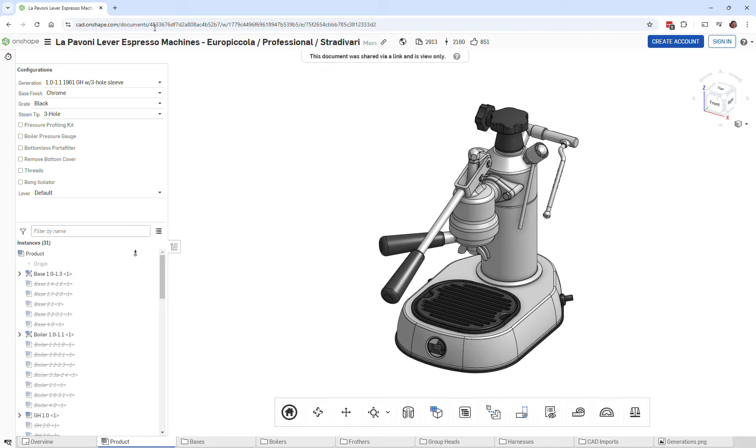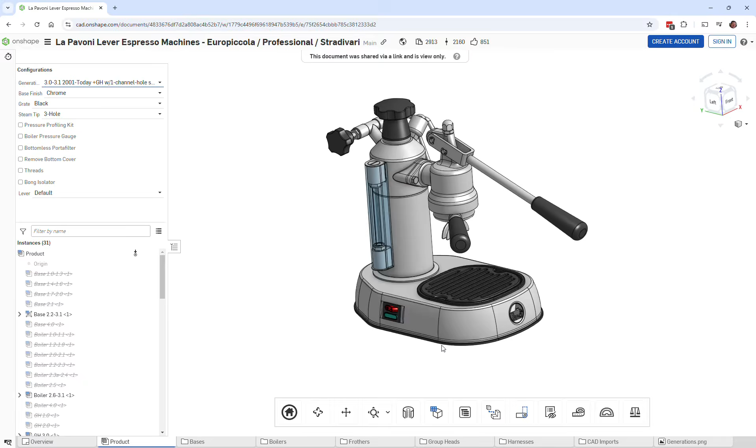So what I'm going to be talking about is we'll first take a look at the Europiccola version 3. It comes with a power switch that's essentially an on-off and a green light. This unit heats to a particular temperature, typically about 0.7 to 0.8 bar of pressure in the boiler, and that's how it works - we use that both for brewing espresso and for steaming milk.

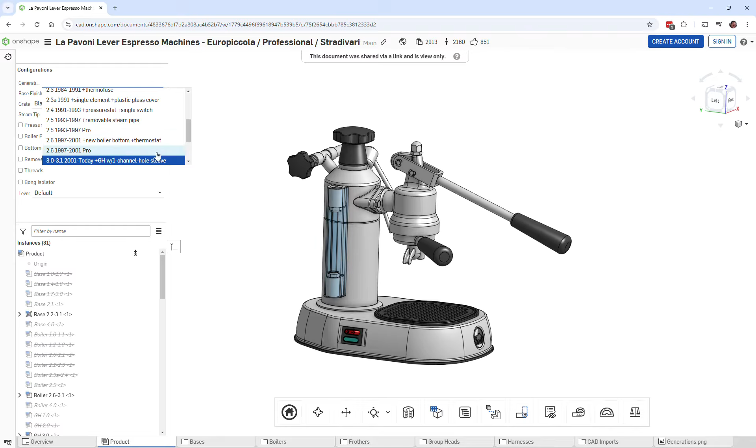There's an upgrade available at Coffee Sensor where you can upgrade it with a dual range pressure switch, and you can see that the switch here changed - there's an on-off switch, and then there's a low-high switch. We've had low-high switches in previous generations of La Pavonis; Generation 2 had some of those at some point. The difference is today's La Pavonis only have a single heating element. The way the low-high worked on the previous La Pavonis is they had two heating elements inside. So we're back to a low-high, but with a single heating element.

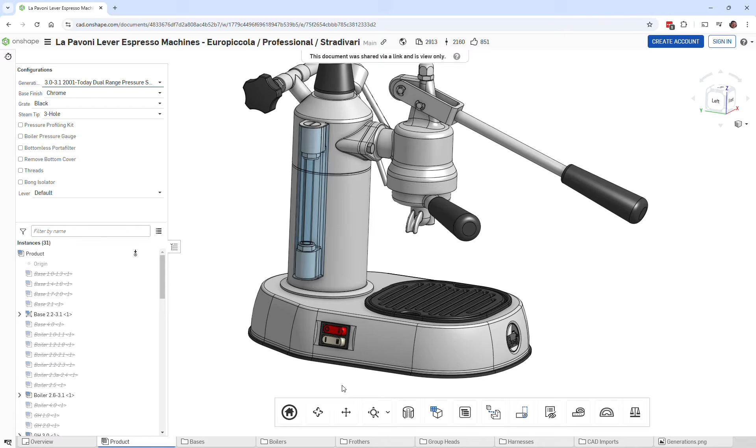So how does that work, and how is this wired up? Let's take a look at the bottom of the La Pavoni with the dual pressure switch. And in fact, let's go back to the one with a single pressure switch.

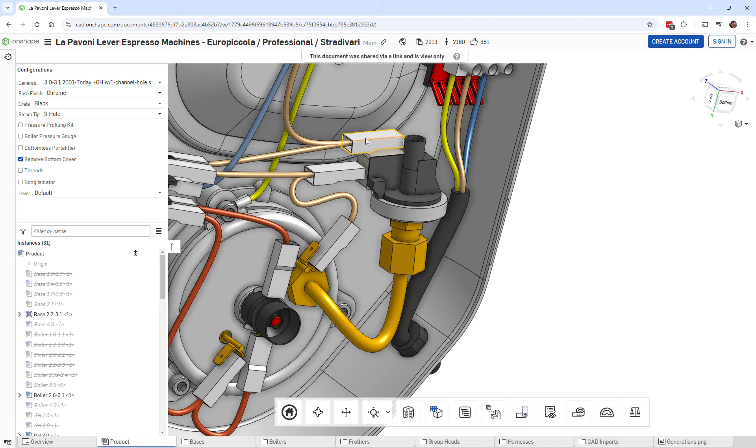You can see here generally how this works is there's a switch here that's connected to the boiler, and this turns on and off, connects these two wires on and off based on the pressure inside the boiler. If the pressure is too low, it will turn the switch on. And if the pressure is too high, it'll turn the switch off. That's kind of how it regulates the heat.

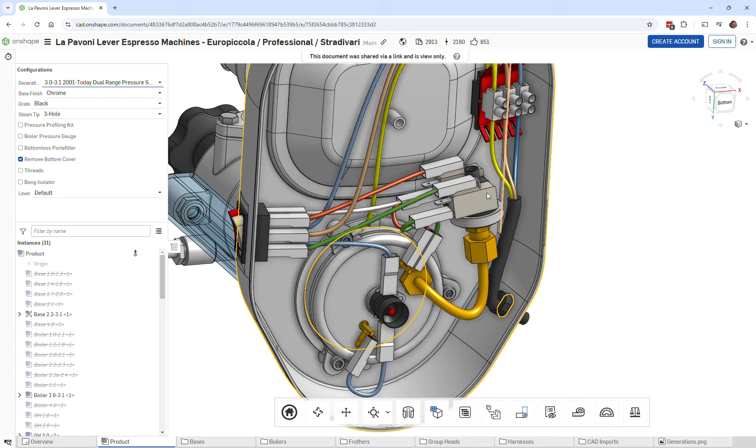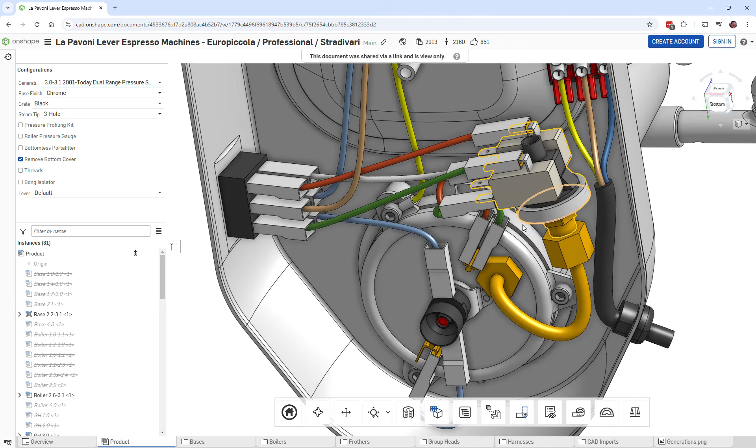We're not going to go into the details of how that is wired up, but we will go into the details of the dual range. You can see the switch changes, and now all of a sudden we have two switches on this pressure stat. Again, it's monitoring pressure inside the boiler, and at a low pressure it turns this switch on, and at a higher pressure - you can kind of see this is raised a little higher - it turns this switch on. So how do you use that to create a dual range, and how do you then incorporate this low-high switch along with the on-off switch in your wiring?

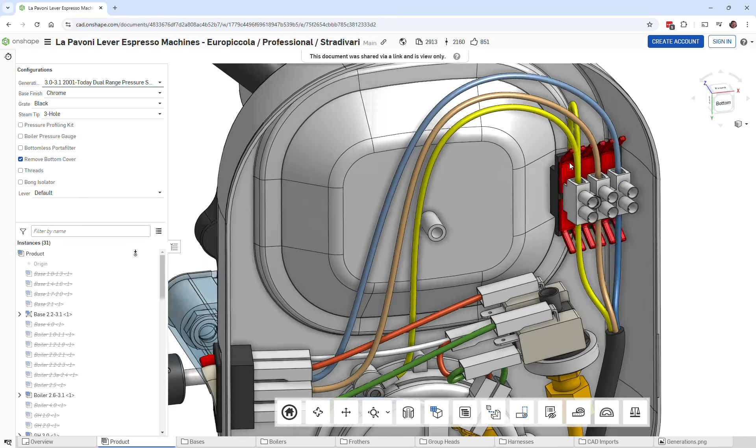So that's what I'm going to take you through. The first thing is the yellow wires here are for grounding. We just go ahead and cover those because those are kind of a safety requirement. Run your grounding wire, make sure that you're grounding the base of the unit, and then make sure that you're grounding the boiler of the unit, so that if there's any short, that electricity will find its way back to the source and trip a breaker.

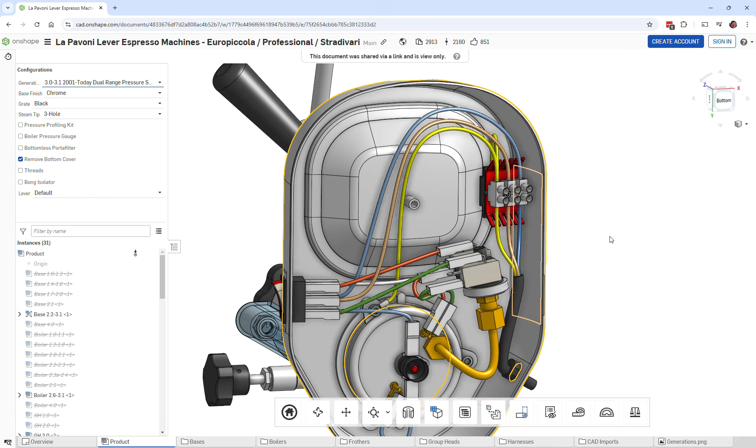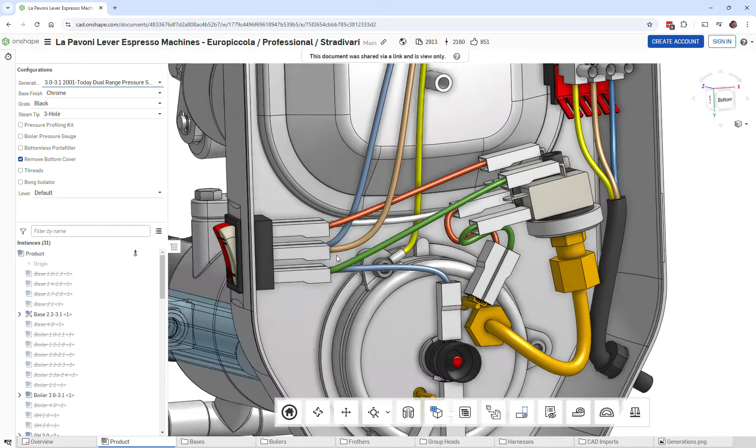All right, so let's follow - we've got two phases here. Some people say neutral and hot, but if you're in European countries, they're both off of neutral, so we'll just call them the brown and the blue. Those two connected together give us power. We got a brown wire coming in here, and it follows its way to the center of the low-high switch. The way this works is if the low-high switch is set to low, as it is here, then it will connect the brown wire with what I've colored a green wire.

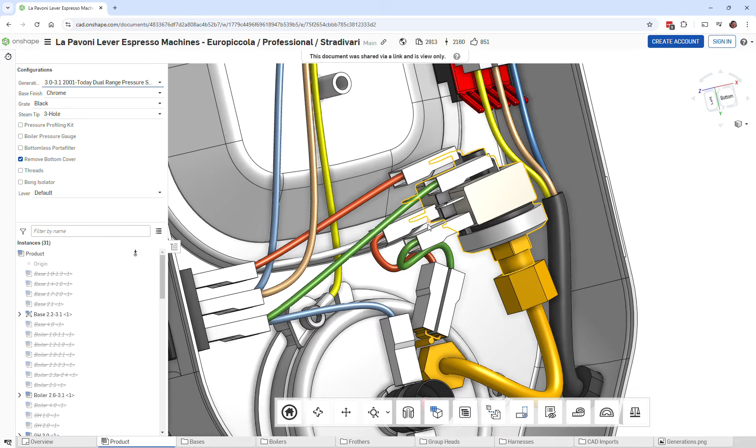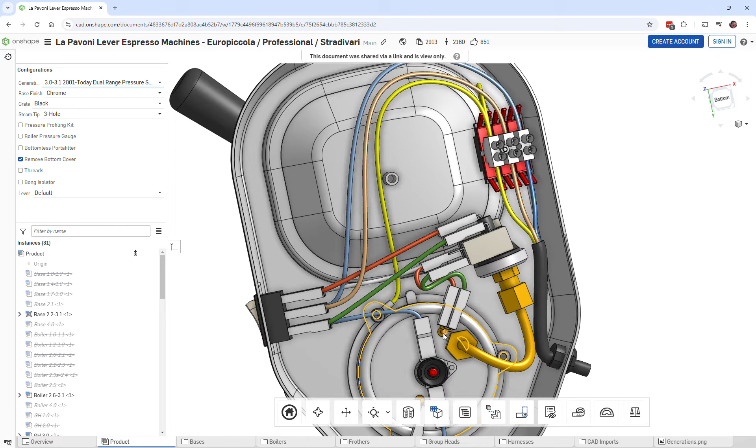And so that green wire goes to this pressure switch, and if the pressure is below, close to zero or no pressure, then it will connect these two. If the pressure hits about 0.7 bar, it will turn the switch off. So if this is set to low, and we run our green wire through here, it then finds its way to the heating element, one side of the heating element. So we've supplied the brown wire to the heating element if the pressure is low, and once the pressure hits about 0.7 bar, the switch will turn off.

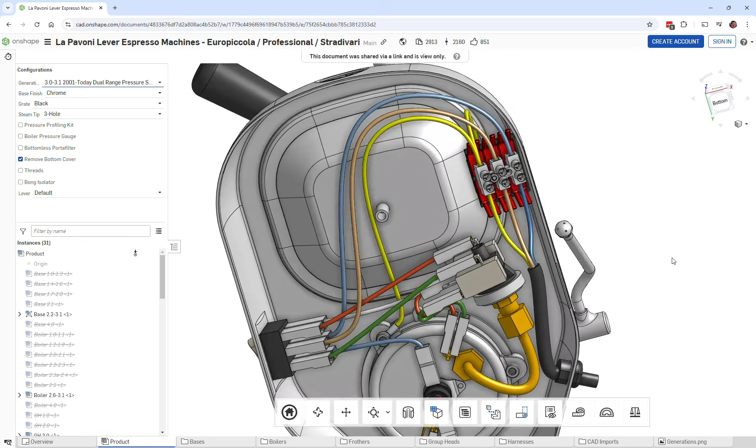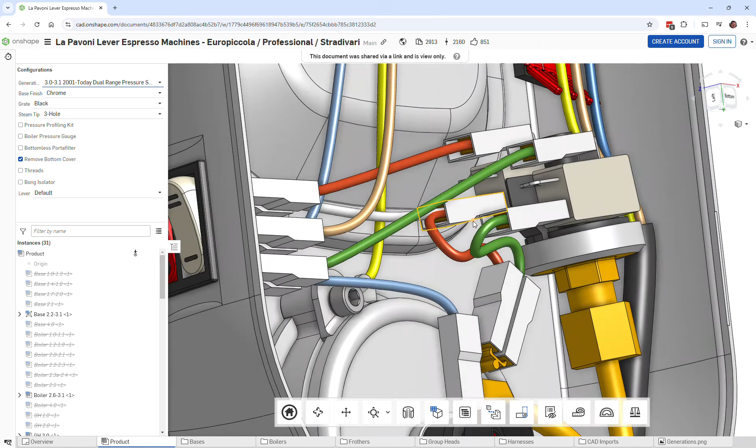Now, if you place this rocker switch into the number 2 position, then instead of energizing the green wire, we energize the red wire, which goes through the higher pressure switch, which requires the boiler to reach a higher pressure before it turns off. If the boiler is below the higher pressure, the brown wire power comes here through the red, comes out through the red of that switch, and goes to the same place where the green wire goes, which is this side of the heating element.

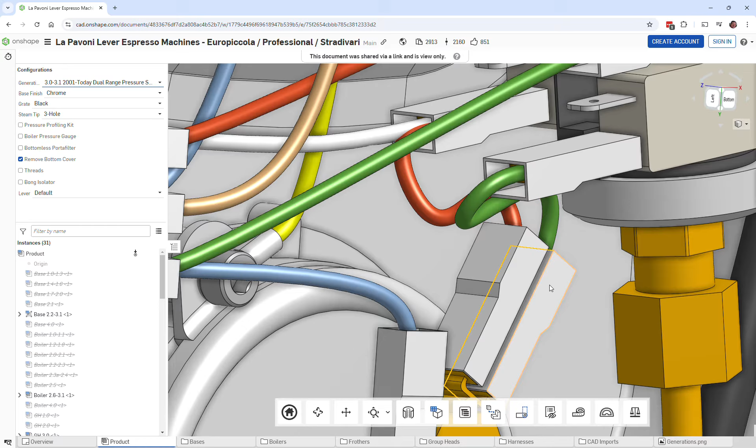That's essentially it for tracing the brown leg of our power, except for this little white wire here, which could be connected here, or here, or here, or here, just as long as it's in one of those four places to supply.

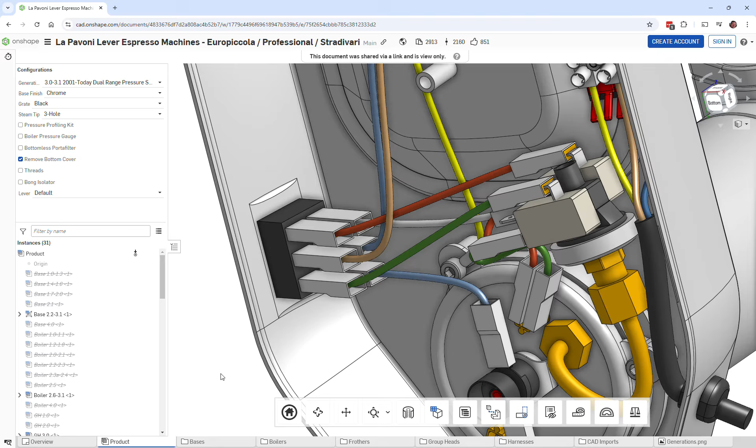What are we supplying? We're supplying the light. So if either of these two switches are on, it's going to power one leg of the light that illuminates this red switch. That's really all the white wire does. You don't really need it, but if you want to know if it's heating up, that light will be on while one of these switches is closed while it's heating up, and that indicates the heating element is receiving power.

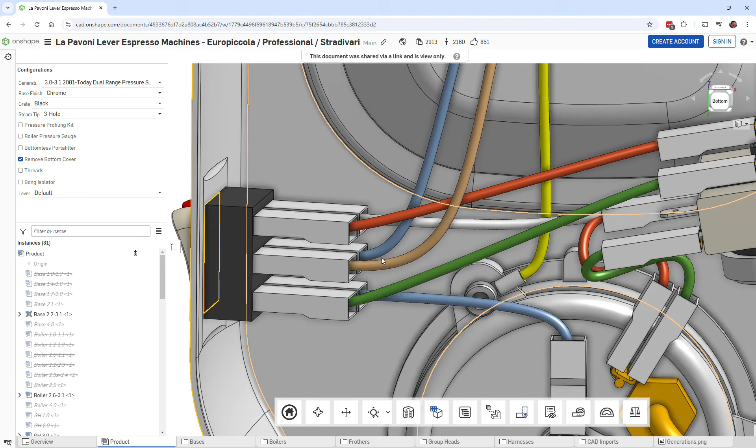All right, so let's step back, think about that, and now dive into the blue wire, the other phase of electricity coming in. It goes to the on-off switch. You can see the blue wire here going to the center, and here's the brown wire lead from the switches. So when you have power turned on, you're going to see both of those coming together to illuminate your light.

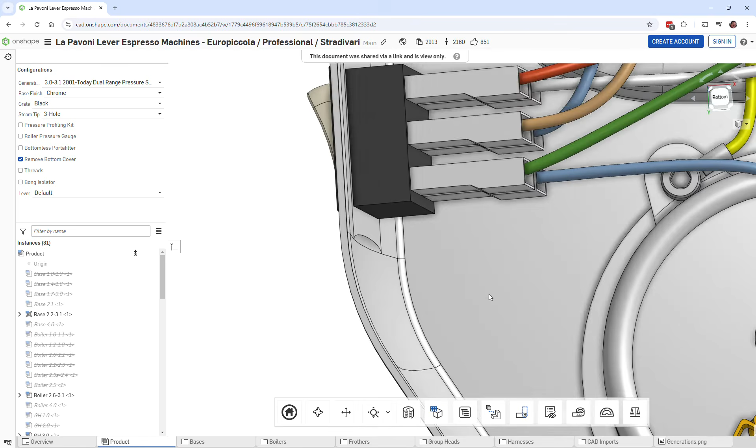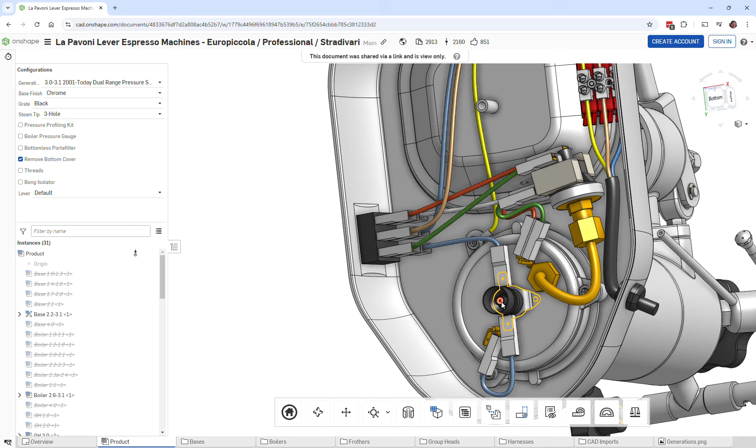So we have power coming in here, and then when you turn it on, that blue phase comes back out of the switch over here. So it's basically an on-off switch for this blue wire. It then goes through the thermal fuse, which if it pops because the boiler is too hot, you need to reset it with this red switch reset button. Then the blue phase of the power comes in and goes to the other side of the heating element in the boiler. That is essentially it.

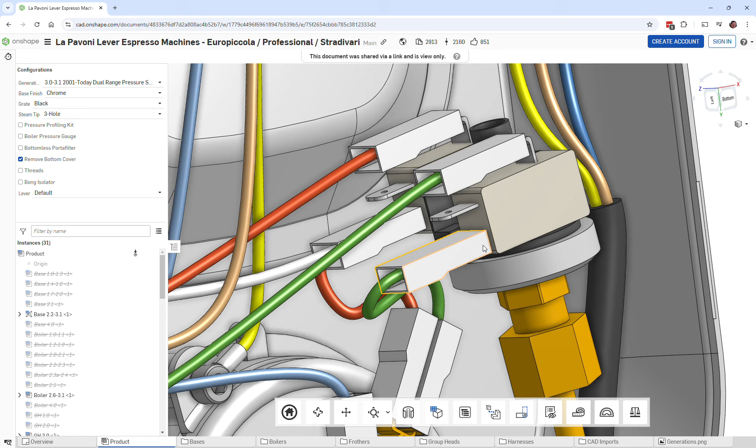That's really all that's required. I think the one thing to point out is that these are double pole, double throw switches, or single pole, double throw switches, and these would be energized when the boiler has reached its temperature. So that's really not going to be helpful, so don't use those. It does matter which one of these two you choose - choose the one that's furthest away from the other lug, which is on the top, the bendy part.

I think that's it. So that's how you convert a La Pavoni to a dual heated La Pavoni.